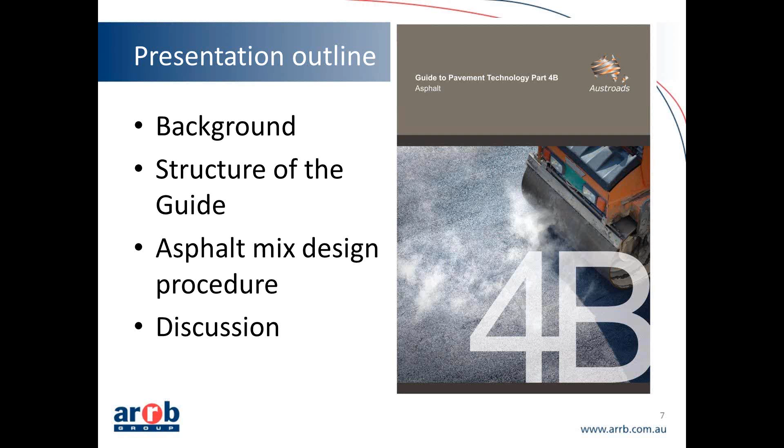As Angela's already said, there's time for a little bit of discussion either during the presentation or at the end. Now, it starts way back when NAASRA, as it was known then, before Austroads,

produced the Principles and Practice of Bituminous Surfacing in 2 volumes, Volume 1 Sprayed Seal and Volume 2 Plant Mix Work. Then in 1984, that Volume 2 was updated, changed to Asphalt Work, and I was in fact editor of that publication.

These guides only provided a very general background introduction to the topic of asphalt or sprayed seals. Most of the detail then was in the road agency specifications or various manuals and overseas publications, particularly the Asphalt Institute manual series and especially MS2, the guide to asphalt mix design.

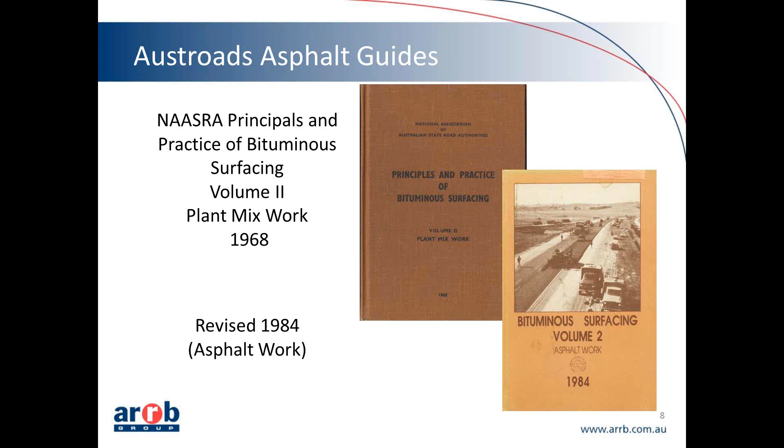This is where the asphalt review really commenced, and I want to pay tribute to John Bethune. He was asphalt engineer at one time in Vic Roads and other senior positions, but he was the technical director of AAPA from 1988 to 2002.

It was he in particular that gave impetus to the asphalt R&D program of AAPA, and with significant funding from the AAPA members, he expanded that into bringing all the road agencies in, as well as ARRB, as a National Asphalt Research Coordination Group.

There was a lot of activity there by the road agencies. They all had, most of them, all the eastern states, South Australia, fairly significant research capability and laboratories. That resulted in outputs such as the Gyropac, the fatigue test, the wheel tracking test.

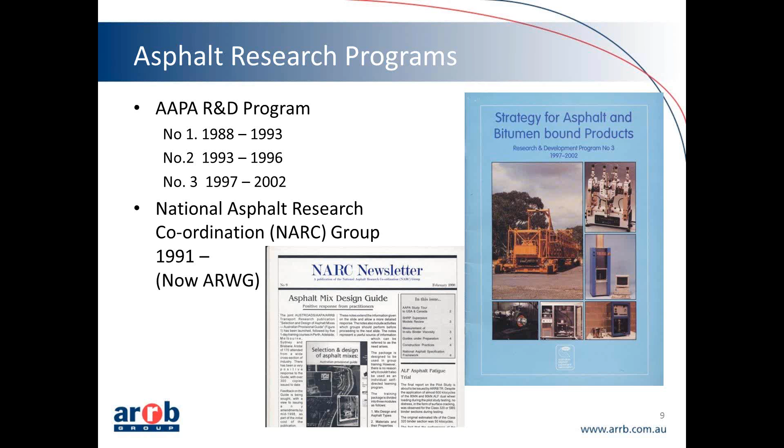Then it was another thought of John Bethune to bring it all together in one publication, and it ultimately appeared as Austroads Pavement Reference Group APRG Report number 18. The first edition in May 1997 with various updates, republished as an Austroads technical report, and then almost hidden away as Appendix A in the first edition of Austroads Part 4B.

The mix design procedure in there was modelled a little bit along the lines of the SHRP Superpave procedure, but using the Australian developed Gyropac, which is a lot cheaper than the Superpave compactors, and also referred to the performance tests that had been developed for mix stiffness, fatigue and wheel tracking.

It was called a provisional guide for a good reason, because a lot of the procedures hadn't been fully validated for the design, and some would say they probably still hadn't been properly validated. Some of the criticisms were that the Gyropac wasn't really robust enough for the proper compaction of samples to represent field conditions, and some criticism that the work results in this guide made it read a little bit too much like a specification.

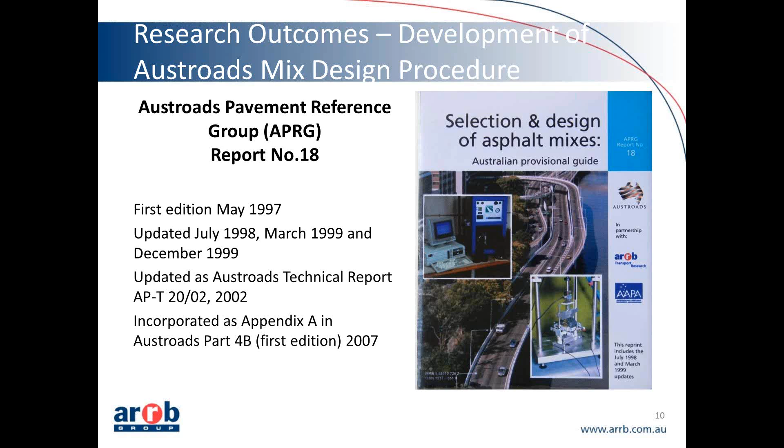Now, in the same era, John Bethune, who always had good ideas and pushed things along, thought that it would be a good idea to have a comprehensive guide to asphalt. The outcome of that was the 2002 Asphalt Guide, of which I was the editor, although it had started its life, I think, as an internal document in the RTA New South Wales, but they'd run out of money.

AAPA put some money into it. They got Austroads to contribute, and we finally produced the Asphalt Guide, published in 2002.

Now that brings us to 2005, when Austroads decided that they would produce a comprehensive guide to all aspects of road technology, one part of it being pavement technology. The original concept was that each part would consist of a brief overview document, only about 20 or 30 pages, but with all the detail in what were going to be called commentaries or appendices.

Part 4B was the very first guide to be produced under that particular model. It was based to some extent on the previous Asphalt Guide, the 2002 guide, but only a very brief overview with the detail put into the appendices.

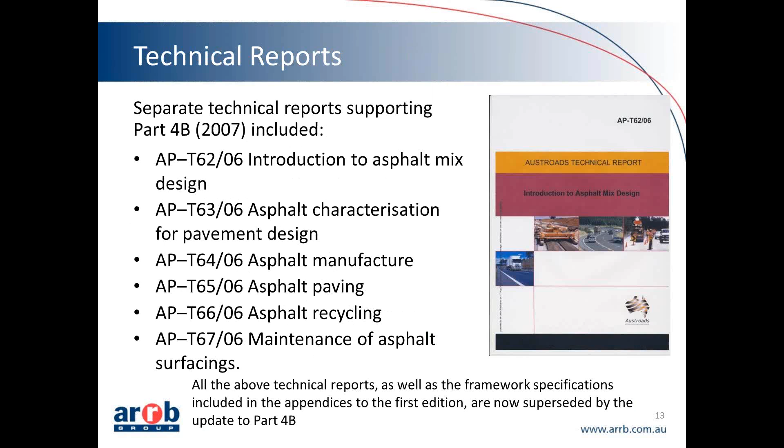So we now come to the restructure of Part 4B, published in 2014 but developed over a period of several years. The principal aims were to revisit the structure, because Austroads quickly realised that the model used for the first edition of Part 4B didn't really work, and no other parts of the Pavement Technology series followed that model. So we needed to revisit the model, and also look again at the mix design procedures, because over the intervening period there had been changes and developments, and in doing that, to harmonise it with other parts of the Guide to Pavement Technology.

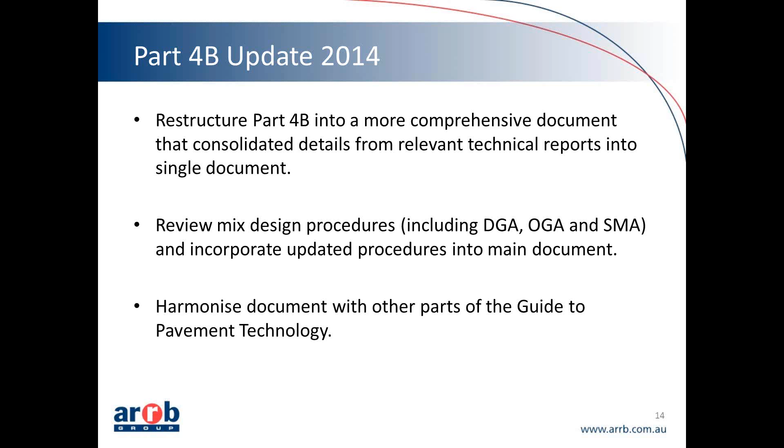So the project commenced in July 2011. It involved a complete restructure of the document, an updating of the formatting, the pictures, charts and reference documents, and alignment with other parts of the Austroads Pavement Technology series, as well as considering any changes in the interim in Austroads test methods and Australian standards.

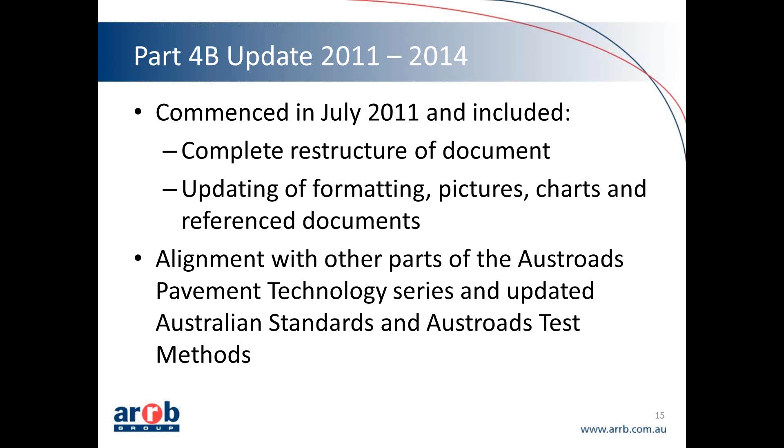Section 2, the asphalt applications and mix types, provides a description of each individual type of asphalt and its main uses, but also refers to Part 3 of the Austroads Guide to Pavement Technology, which covers surfacings. Section 3 on materials talks about the major part of each material that goes into it, but also refers to other parts of the Austroads guides, because there are separate guides to bituminous materials, to aggregates and to recycled materials, which are referenced in Section 3.

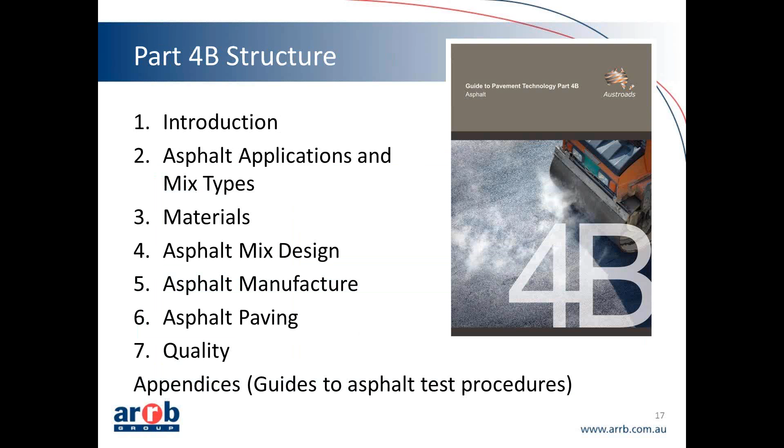So that pretty much covers the background, and I guess there's an opportunity now to see if anything comes forward. The audience is a little bit shy so far, or maybe everything you've said makes really clear sense.

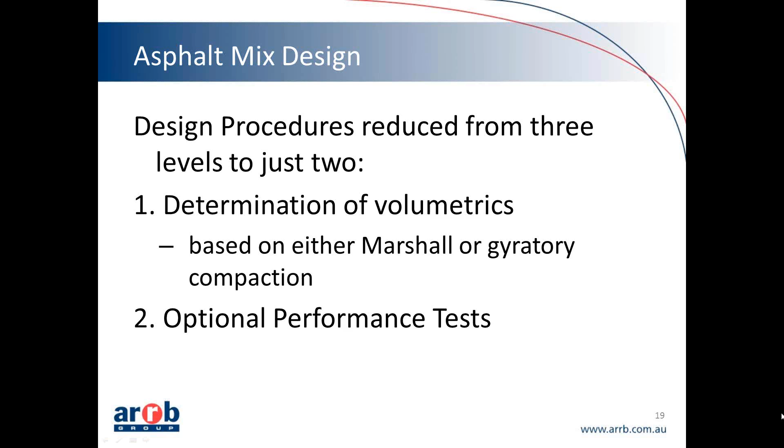And level 2 covers performance tests, and the performance tests are optional. Moving to the next slide, I would like to cover level 1 testing, as the process of the asphalt mix design normally involves the selection of the asphalt type, the aggregate and the binder type, and we are dealing with the determination of the aggregate grading and the binder content. In this process the engineering properties of the asphalt mix will be optimized. It's very important that we are referring to optimized properties with regard to asphalt.

In the process, the designer should keep it in mind that our final goal in the design process is predicting in-service behavior and performance, and we base our predictions on laboratory testing. Therefore it is very important that we produce in the laboratory samples which are relevant to, or close to, in-service conditions - in this case in-service densities and air void content.

It is also quite an important aspect of the design that we are considering the manufacturing and the paving standards already in the design process, and these are not separate items.

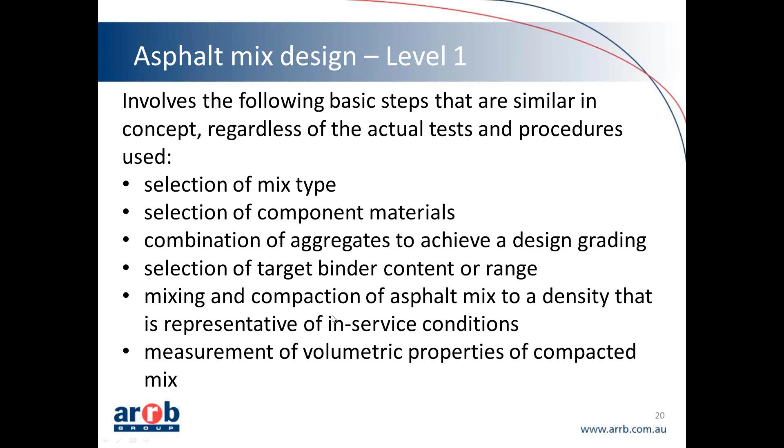Moving to the next slide, that gives you a visual experience of where the volumetric properties such as the bulk density, the VMA, the VFB, and the stability and the flow are visualized as a function of the binder content. The Marshall stability and the flow may also be included in this analysis. It's definitely included in Part 4B, as these properties really form part of the optimization of the volumetric properties.

But we need to keep in mind that these two properties are not particularly considered a good performance indicator, and additional level 2 testing may also be undertaken on mixes designed using the Marshall method. But that also relates mainly to heavy-duty mixes.

If we are conducting a very detailed design, we prepare specimens with a target binder content plus minus 2 other binder contents, which is a 5-point Marshall design. In a simplified process, which you can see on this slide, we refer to a 3-point design where we are targeting a binder content plus minus 1% below and above this target. Of course, once we've plotted these values against the binder content, we do an analysis and compare the results with the relevant specification requirements.

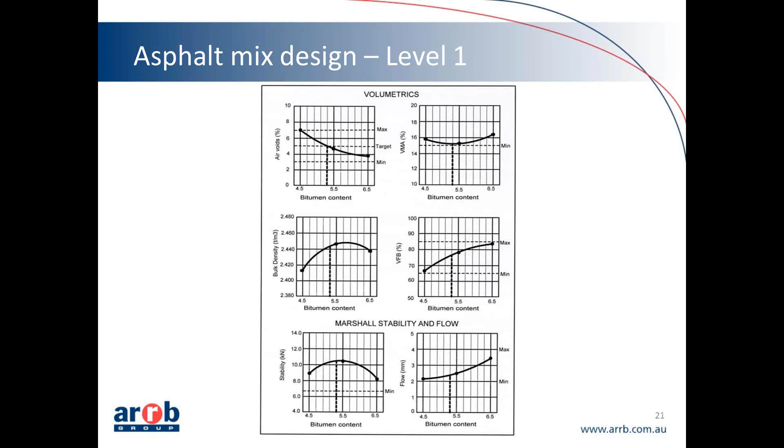Part of level 1 design - if you move to the next slide, sorry - part of level 1, it's very important that we prepare samples which are really relevant to in-service conditions. Since the achieved air void content has an enormous impact on mix performance, it's quite important that in the laboratory design process we compact the asphalt to a density that is representative of the in-service condition. That process involves the compaction, the conditioning, and the mixing.

Where the temperatures should be selected according to the mix type and the binder type. These aspects are not covered directly in Part 4B, but they are covered in the relevant Australian standards, which is 2891.2.2 for the gyratory compaction, and 2891.5 for the Marshall compaction. Just a note, to my best knowledge, that latter standard for the Marshall compaction hasn't been published yet, but please watch the Australian standard website, as I think it will be published very soon.

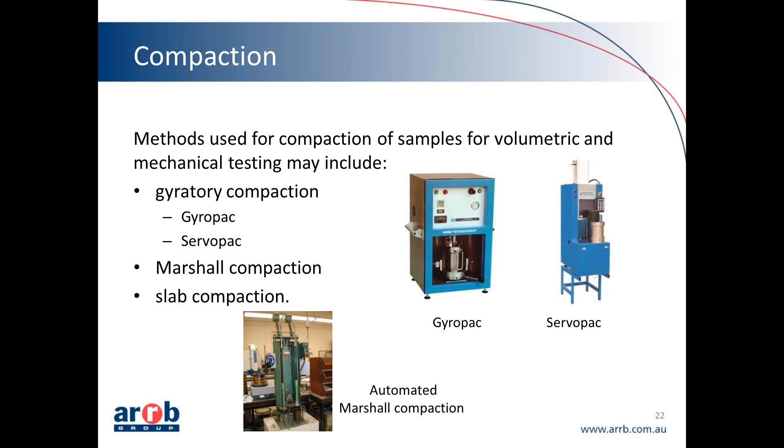other agencies still continue to use the Marshall compaction due to its simplicity and the collected relevant experience over time. Moving to the next slide, that refers to level 2 testing. And we have heard from John all the background and history around the developments of the fundamental tests in the last decades in Australia.

Level 2 of the mix design, as it is now in Part 4B, offers optional performance testing. And the performance testing, as we consider them, predict the in-service performance and also deliver some basic engineering properties such as the stiffness or modulus and the fatigue, which may be then used in the mechanistic pavement design.

Broadly, the procedures for mechanical testing can be divided into three groups. One is the fundamental, or commonly referred to as performance-based testing. These deliver engineering properties such as stiffness and fatigue, and that may be tested by using the repeated load indirect tensile test or the repeated flexural bending.

The other group is the simulative or performance-related test. These are mainly the wheel tracking test and the moisture sensitivity test. And the third group is really a bit outstanding - that's the Marshall test, which is also considered a mechanical test, but it's not fundamental and it's not simulative. It's an empirical test method, and it is performed only at level 1.

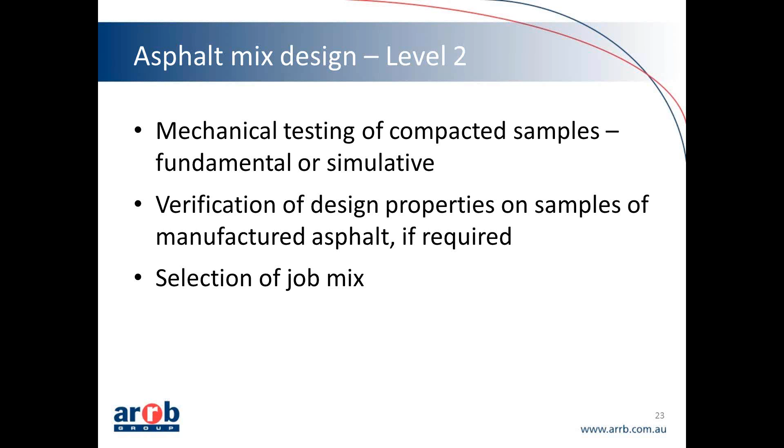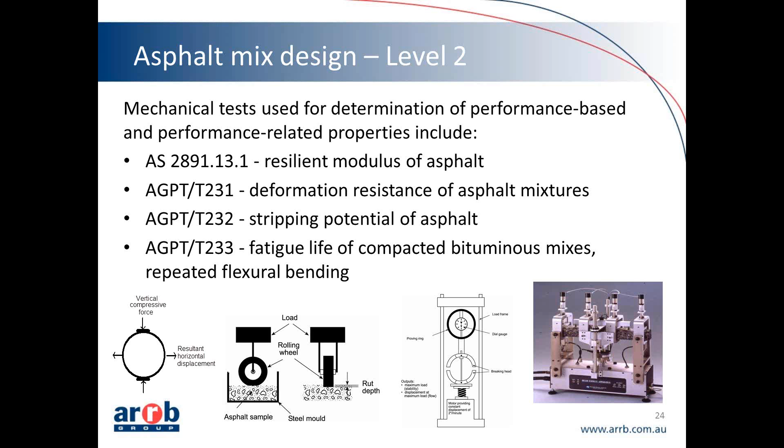The next slide gives a quick summary on the performance related and performance based tests: the resilient modulus, the deformation resistance which is wheel tracking, the stripping potential which is moisture sensitivity, and the fatigue life using the repeated flexural bending test. These tests, again, are optional and may be specified in the relevant road agency specifications.

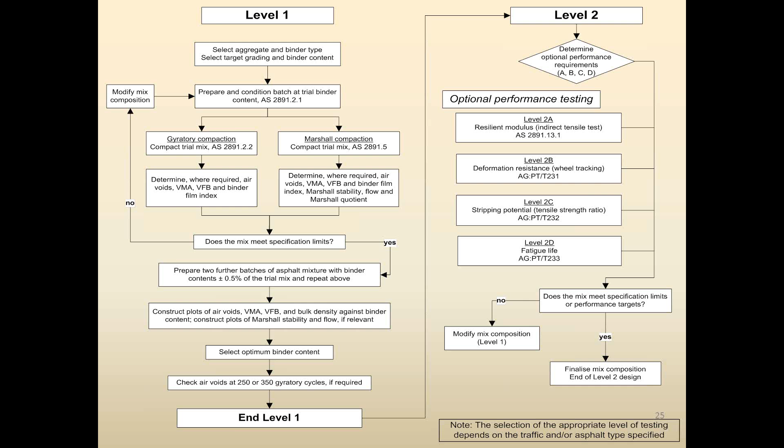Rather, I would like to give you some more information on the next slide with regard to actual steps in the design procedure. So tables 4.2, 3 and 4 in the updated Part 4B provide practical guidance on the asphalt mix design steps. These are outlined in much bigger tables in the updated guide,

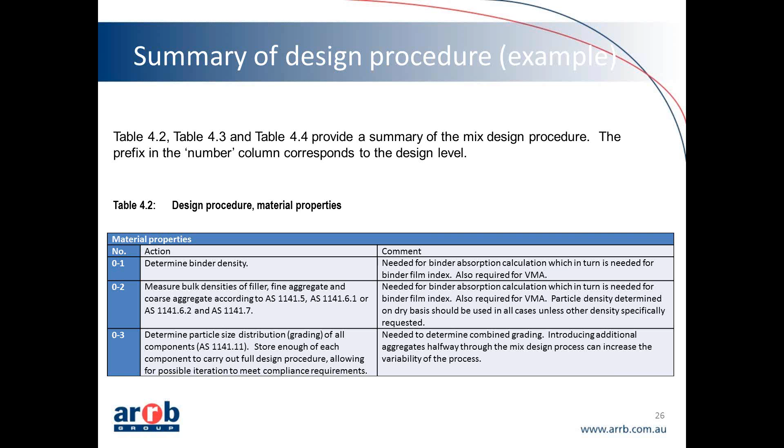and you will find on this slide that we are referring here to level 0, but we just said we only have two levels. We refer to level 0 as testing of the constituent materials, which is basically testing of the binder and the aggregates. Moving to the next slide brings us to level 1 testing.

This is just a snapshot of what you can find in Part 4B, table 4.3 on this slide for level 1 and 4.4 for level 2. These tables provide some real practical suggestions on how to perform the design, and it also has references to the relevant Australian standards and the Austroads test methods that are relevant.

Please note that in table 4.4 you will find the word optional quite frequently, and this wording is intentional. It's really up to the road agency to specify these requirements.

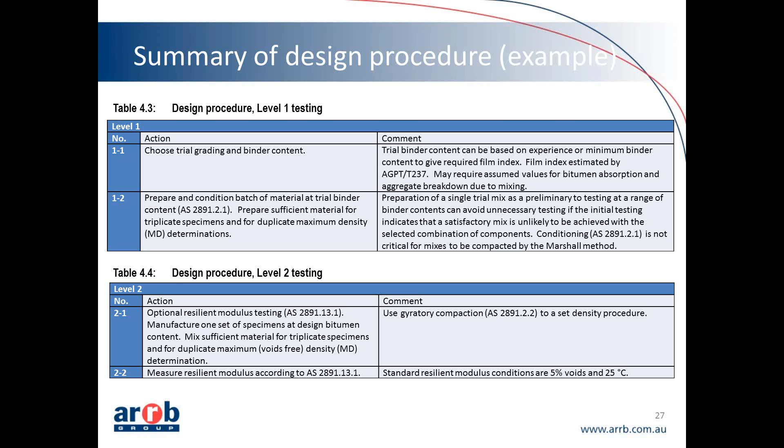That basically summarizes the mix design in general, but additionally I'd like to move to the discussion of stone mastic asphalt, SMA, on the next slide. As I already mentioned, asphalt mix design procedures are developed around hot mix dense graded asphalt, but the procedure can be applied to other mixes. Volumetric characteristics are essential to every asphalt mix, but this is particularly true for SMA.

SMA is quite sensitive. A small variation in grading and/or binder content can lead to low in-situ air voids, which causes flushing and bleeding on the surface, or on the other hand, high in-situ air void content leading to permeability and poor in-situ performance. This is why in laboratory compaction it's very important to target an air void content and density which replicate the volumetric properties in the field.

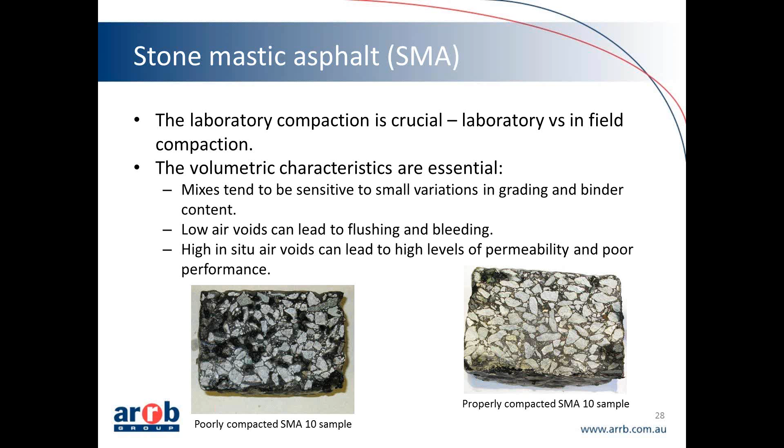On the next slide, I'd like to briefly discuss the history around SMA compaction. There was a national workshop in 2006 that identified 10 issues around SMA design, 4 of which were considered critical. As a result, numerous Austroads projects were set up to address these issues, which were then investigated in research programs, and the outcomes are now included in the updated guide.

What are these considerations? Briefly, the Gyropac compactor is not really capable of achieving the same level of compaction as the Servopac, and that may lead to unreliable results in the laboratory, especially when using a polymer modified binder and/or active filler. Another outcome is that the Servopac provides the most reliable compaction with good indication of in-field densities, and also Marshall compaction at 50 blows provides reliable indication of field compaction. So both compaction methods may be considered in the design.

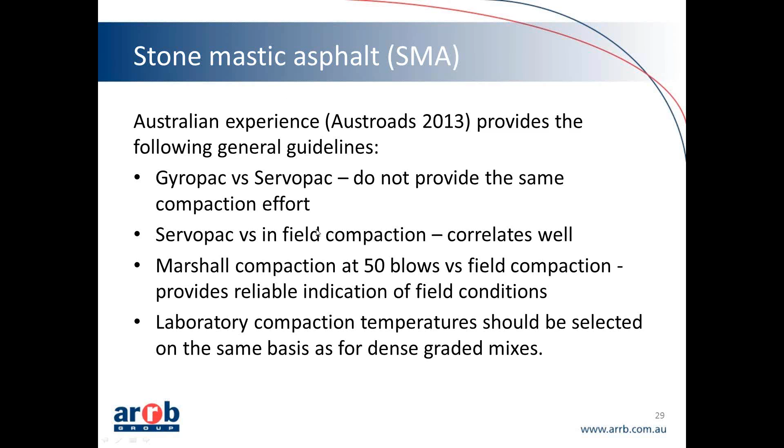The next slide is also related to SMA, that is the grading. During the update of Part 4B, it was identified that road agencies in Australia specify SMA according to their local good experiences, and it was not possible to identify a single common grading envelope for SMA in Australia. As a result, Part 4B, referring to good practice, only specifies the grading control points, based on the European product standard for SMA. We need to remember SMA was originally developed in Germany, where it performs very well. So the grading control points are now in Part 4B.

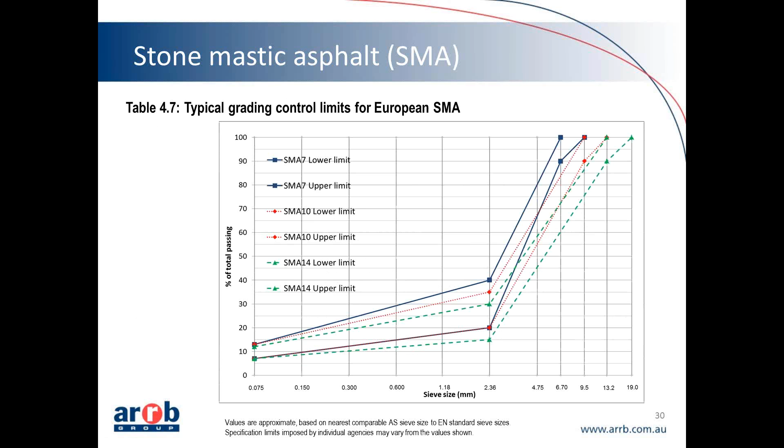It is tabulated in the guide, and the grading envelopes specified by different agencies now fall within the control points, so a framework could be provided for SMA as good practice. The next slide again refers to the framework - not a specification, but a framework with regard to binder content, and the binder content guidelines are in line with binder content in Australia: 6-7.5% for SMA 7 and 10, 6-7% for SMA 14, and the relevant road agency may specify a narrower range in the design.

Just a closing comment on the optimization process - the aggregate packing theory is mentioned in the guide. There's no real procedure provided there because this is really a work in progress, but it may provide a good tool for designing better performing SMA.

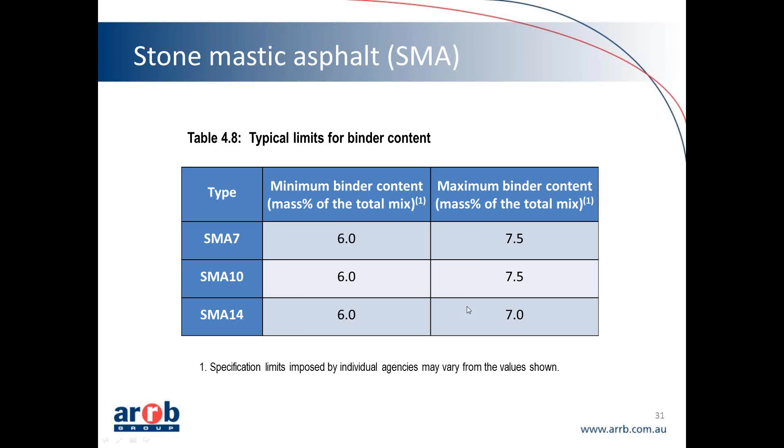So this concludes the section on asphalt mix design, and this is where I can hand over to John to discuss the other asphalt types and other technology options now included in the updated guide.

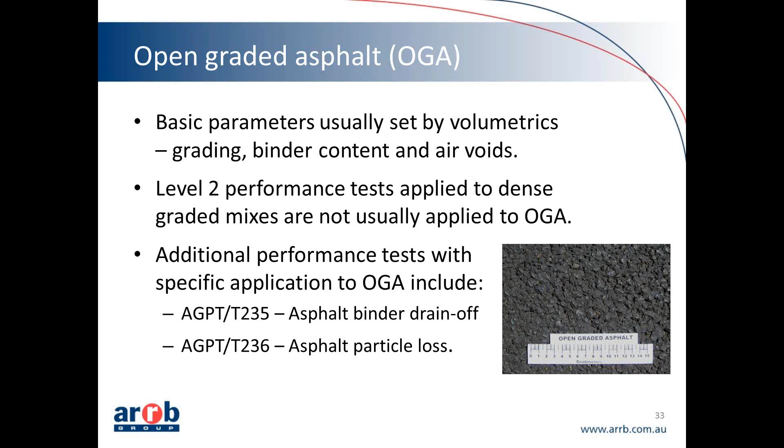These are a binder drain-off test and the other is asphalt particle loss. Both are applicable to open graded and give some indication as to how those mixes might perform, either during manufacture or placing, or even at some level in service. In the first edition of APRG 18, there was an attempt to build a rational design procedure around those particular tests, but it was never properly validated, and we've now dropped that out of the current update.

If we now move on to another variation, which is warm mix asphalt. Warm mix asphalt is probably the largest single revolutionary change in asphalt manufacture and placing that's occurred in the last decade or so.

There are various ways of doing it. It started off with people who promoted additives blended into the binder to change the binder flow characteristics so they could be mixed and placed at lower temperatures. People came along with other additives added directly into the asphalt mixer, and then people found that simply by using water to foam the asphalt, it changed the way the binder could coat the aggregates at lower temperatures and also improve the placing.

And then there's also the proprietary process that involves a sequential aggregate coating and binder foam technique, but it does require a special mixing plant.

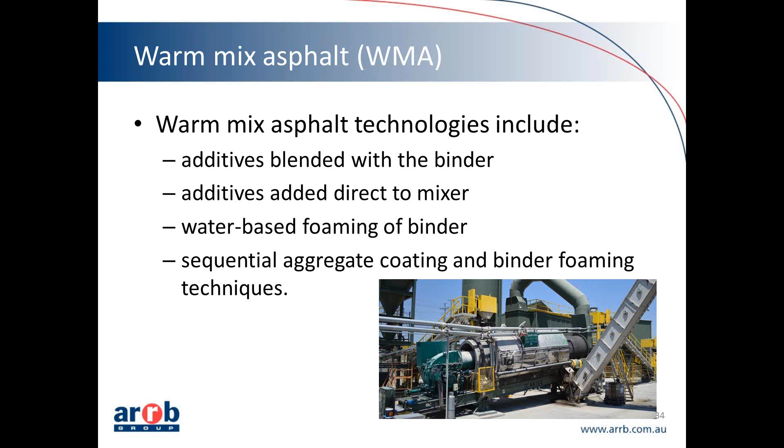So when it comes to design, the actual end product should be exactly the same as any other product, whether it's manufactured using warm mix technology or done at standard temperatures.

The difficult part is being able to simulate the mixing procedures in the laboratory, and some of the processes require special laboratory mixing equipment. Or if it all gets too hard, merely taking the material from production and testing production mixes is a more effective way of ensuring that what you're testing is representative of what's going to be placed.

And the tricky part is also ensuring that your mixing and compaction temperatures are appropriate to the relevant warm mix technology. So that's about all I want to say about warm mix, unless people have questions.

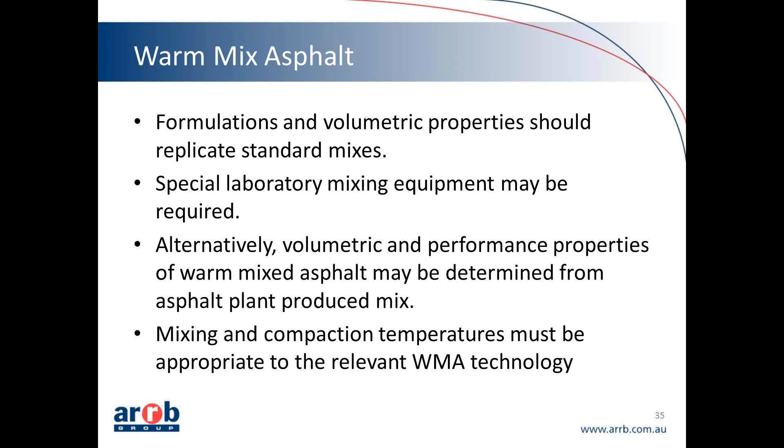And then finally, there are a whole lot of other minor variations to the way asphalt is produced, including the use of reclaimed asphalt pavement, which is a very important feature as we try to conserve materials. Asphalt is probably one of the most recyclable products out there because it should never be discarded—it should always be reused. In fact, in the United States, they say something like 80% of asphalt is recycled back into new asphalt pavements. So there are some guidelines in Part 4B on the design of mixes using reclaimed asphalt pavement.

There are a few guidelines there on polymer modified binders, because they do change the handling characteristics and workability of the asphalt mix, requiring some adjustment to temperatures and compaction procedures. There's a little bit of advice on the use of crumb rubber, and also not entirely neglecting the use of cold mix materials, which are used in maintenance patching and the like.

A little bit of advice on cold recycled asphalt, which is to take the reclaimed asphalt pavement, mix it with some fresh foam bitumen binder or emulsion binder, and put it down as a base material. And also we haven't entirely discarded discussion of fine gap graded asphalt, which is another variation of asphalt suitable for lightly trafficked applications where you want a nice smooth finish and a very workable mix that can be compacted to make a good durable asphalt.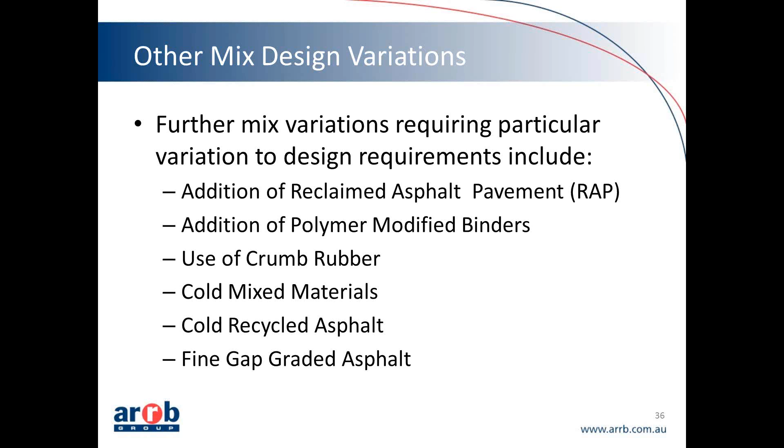So there's a little bit on each of those materials in the guide, and I guess if people want to ask questions we can answer them. So that finishes the formal part of the presentation, and we're open to any further discussion.